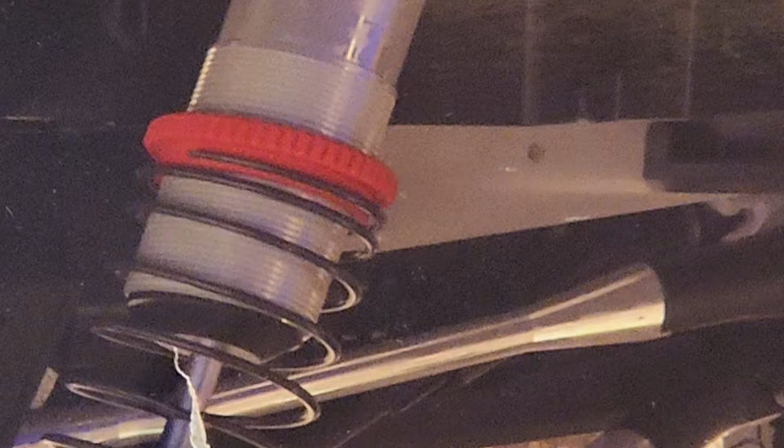No, there's nothing wrong with your computer, and there's nothing wrong with your eyes. Everything is fine, except everything has just been turned upside down. Or maybe everything has just been made enormous.

Well, there is a new kid on the block. But is he new? Or is he just wearing a new suit? This is a question of old: what came first, the chicken or the egg? One ponders.

What I have on the bench is the only one of these I have seen on YouTube in the United States. I'm not saying I'm the only one who has one, I'm just saying I haven't seen anybody else. You see these pretty readily on YouTube in other countries, and Facebook, places like that. But this is going to be an unboxing, yet another exclusive for RevKevRC.

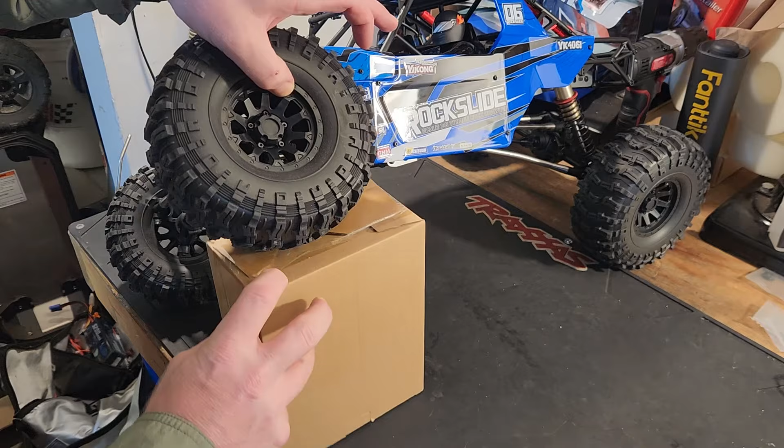That's almost exactly it. However tall this is, let's get our tape measure. Did I say 10? I'm at 8 and just a little over a quarter. I'm a guy, everything looks longer to me. Pretty good, though. That's pretty good.

And there's more adjustment left in the suspension because they have the adjustable. Let me pop this open. But let's just take a second and look at how much more interesting this is to look at than the Vertex. Now, don't get me wrong, I'm not hating. This and the Vertex, according to YouTube, were co-developed by YiKong and Redcat.

So I'm not mad. I just think that for what I like, this is a better value, regardless of the servo being a little bit less powerful. But I have a remote that allows me to program more things if I want, because I'm going to add some other lights. And I can add a higher power servo.

And, well, in this application, I don't know what these lights can take. I need to pop this open, the receiver box, and see what this thing's running and if there's a rating on these lights, because I don't want to burn those out. Because I could just run a direct power servo and avoid damaging anything.

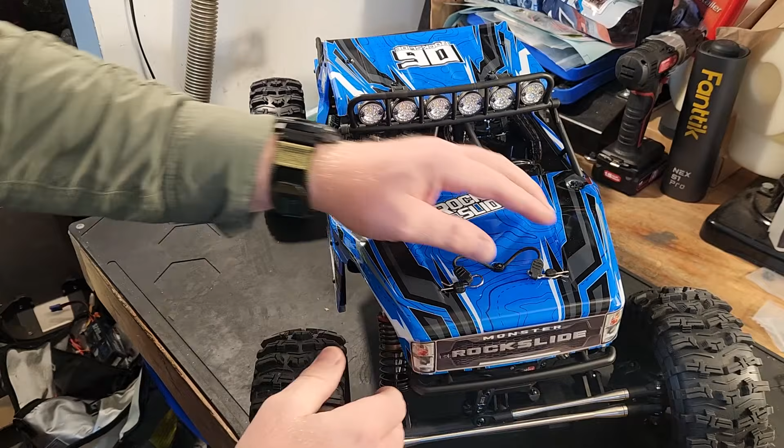But let's pop this thing open here. It's got a nice cage. I'm going to raise this. There we go.

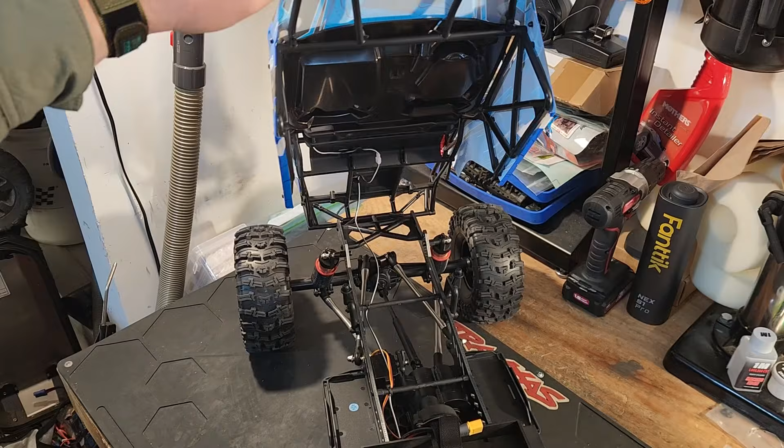It's got a nice cage in here. So our body posts and our body pins are not interacting with the body underneath. So that's nice, I think that's a good feature.

Very well braced. These posts right here locate into the cage, right there. So when you do roll it, you have this to roll on, you have this to roll on, and then it's all supported right there, which goes into the frame itself. So if you do end up crashing this thing, it probably won't be the end of the world.

Not to say it would be the end of the world for the Vertex, but I don't think that thing is framed at all from the videos that I watched.

Everything else about this is basically identical in terms of function and parts. So let me rotate it a little bit closer there.

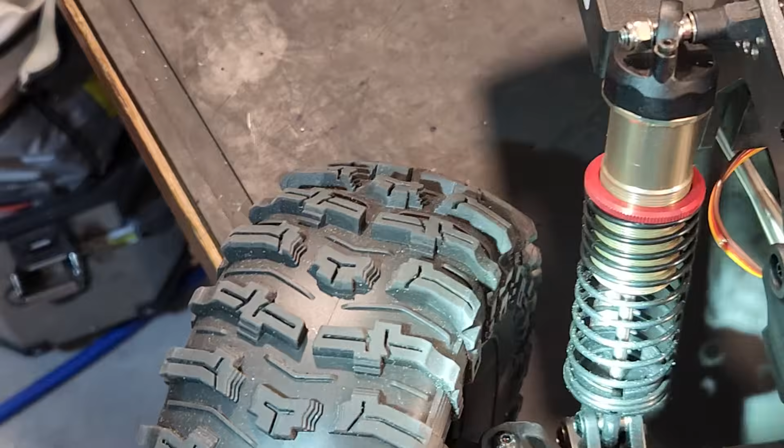Same, I forget what they're called, but the thing that everybody was talking about and they didn't quite understand what it was for or why you would do it. That thing, there it is. Right there. This little insert so you can flop this around and change the effective length of this bar. It's on both sides, on the top and the bottom, and also over here, if I can get the camera to show it. It's over here too. This side it's down here underneath because that's the same bar.

So it has that same weird thing they built into the Redcat. Exo Caged swapped his to see what it would do, and the last video I saw, he wasn't quite sure what the heck it was for. So, I don't know.

Pull you out a little bit better. What's the word? Steering servo horn, 15T. This one has 3 holes so you can adjust. If you don't get quite enough throw, you can adjust it a little bit more.

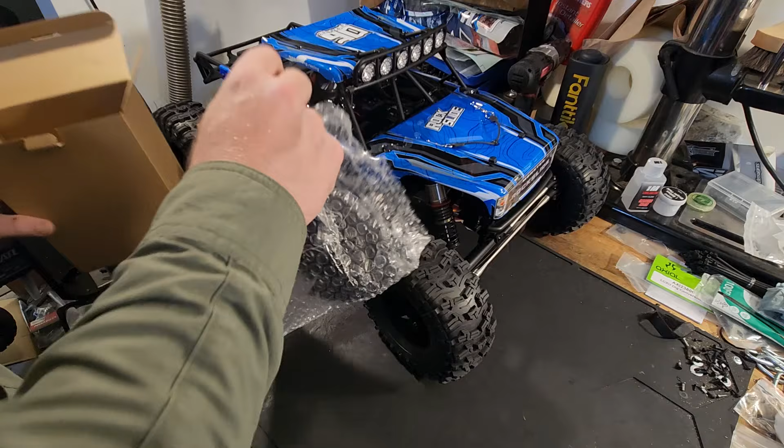Let's do the obligatory open the remote. We know there's a remote in here. This is going to be our beloved, tried and true Dumbo. Standard equipment for a lot of these RCs. And Dumbo is one of my favorites because they just work.

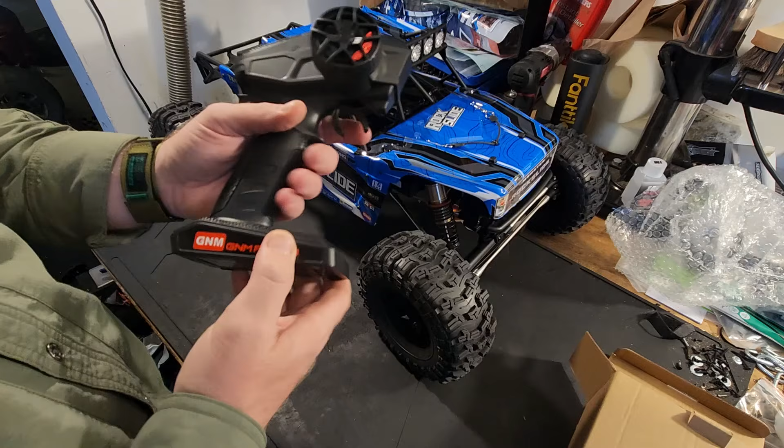They work. I might stick this on my DDF 350 just for the sake of controlling multiple cars with one radio. Although I might not.

It's got all your normal stuff. Steering trim, throttle trim. I don't think Channel 5 does anything. You can hit the dip switches and change all that good stuff. One of these is going to be for the overdrive, and then one of these is going to be for the lights. So we'll see what happens.

Let me get some batteries in it. We'll power this bad boy up.

All right, this is a 3 and 4S capable RC. I've got a 4S here. This has got a plug that I don't use, but I've got a workaround knowing that this was going to happen. I don't advise doing this. I will be taking this off and putting on either an EC3 or an EC5. But this is a hodgepodge of adapters. I only use these for charging batteries, never these, because I don't have these batteries.

Yep, that goes the other way. We're going to get us a battery in there and see what this thing acts like when we put it on 4S.

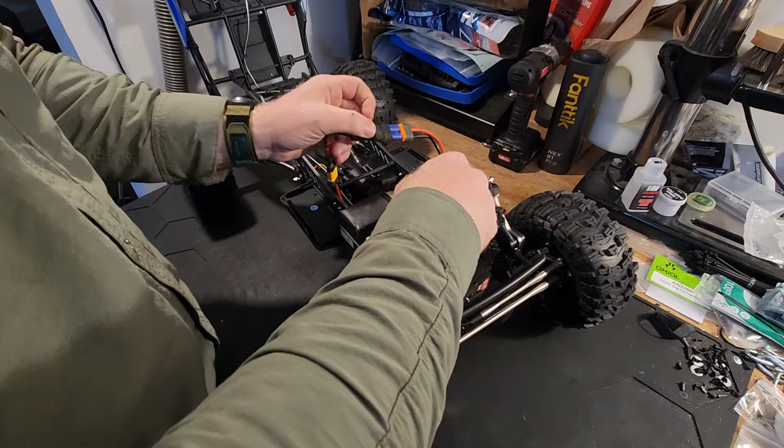Battery strap. If I didn't have this in here with it, it'd probably be long enough. It's a little short. I don't like the idea of this ridiculous adapter hanging out. I just might have to let it go. I'm not going to go and jump it out of a window. All right, well, that's just going to do that then.

All right, got some batteries in here. Turn that on. The button. All right, that was the right sound.

He's going here pretty smooth, not a whole lot of fuss or fighting. Not a ton of jiggle. That's cool. Servo's slow, but it's turning.

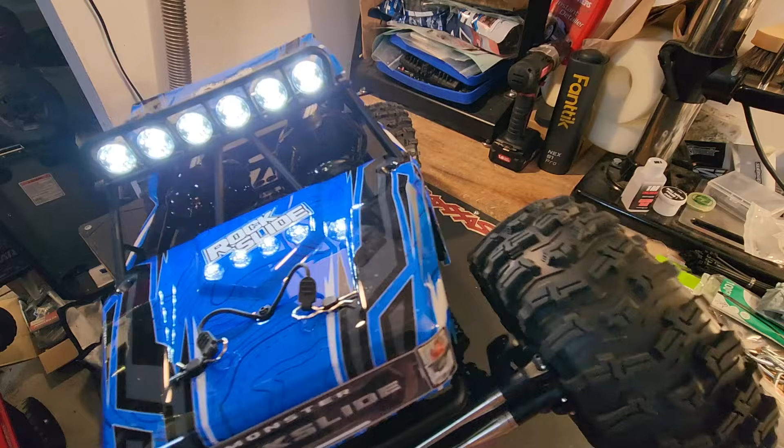Pretty good lights too, see what I mean? You just kind of get more with this. You get the drivers, you get the lights. Will it perform as good? Probably not, simply because it's going to have more weight up high. But that is manageable. You could add weight low, or you could just be okay with something that doesn't perform like a competition crawler.

Everywhere, all the time. Speaking of that, I didn't show it, but this does have it: the skid. It's the same skid. It's got that angle. I don't know if it's obvious, but it is angled lower here and higher here. So it is, in fact, the exact same thing.

Drag brake is really good. That's solid. Okay, so one of these... nothing, good. Okay, I heard a servo. That's going to be our overdrive, underdrive.

Let's see if I can capture that on camera. See the wheels turning. This is so much lighter than SCX6. It's ridiculous. Oh yeah, I can see it. That front's moving considerably more. I think it's supposed to have like 30% overdrive. Let me take it off and we'll see what it looks like.

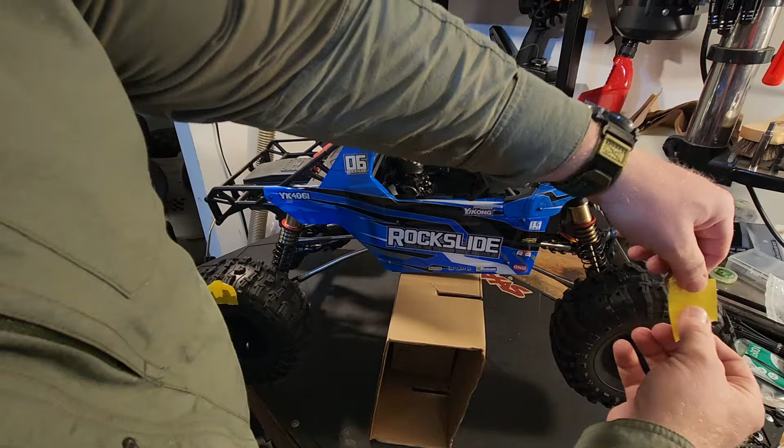Yeah, they didn't program the Hobbywing, they just flipped the dip switch. Okay, same speed. Nah, let's do the tape. Proper way, right? Do the tape. We'll make it extra obvious.

Which one of these slows down or speeds up? I say the rear slows down, the front stays going the same speed.

Yeah, the back even stopped a little bit. Let's make it more obvious.

Yeah, I say it's actually underdriven, and if somebody knows better, if I am just not understanding terminology, which is 1,000% possible.

Now the rear is not going the same speed as the front, so they're calling it overdrive. But to me that is underdrive, because the rear has become underdriven. The goal, of course, is to have the front become faster than the rear, and they've accomplished that not by making the front go faster, but by making the rear go slower. So it is underdriven in the rear, not overdriven in the front.

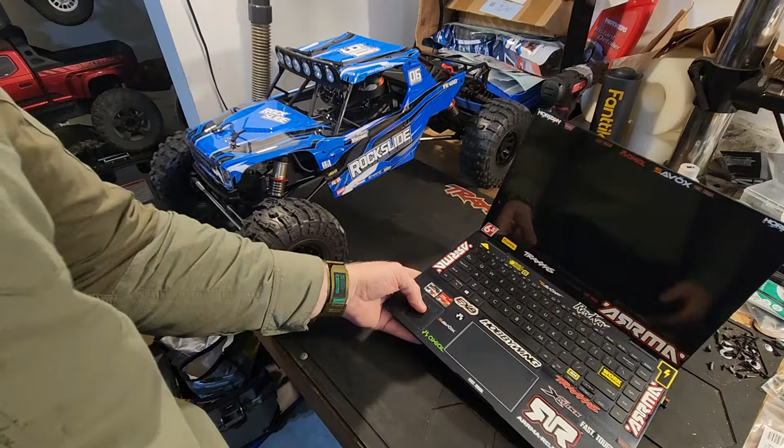Turn that off, grab the old computer. I'm going to take you guys out of there and show you what we got going on screen. All right, got you right in front of my laptop. This is about as good as it's going to get.

We got Vertex pulled up here. Things look pretty familiar, don't they? Showing all that. Oh yeah, and the Vertex one is in color, so I do like that. I do like that. I have that battery. So all the general stuff, kind of your quick start, how to do things.

Underdrive. They have called it underdrive, which leads me to begin to believe that the YiKong is more of a creation of Redcat than it is a creation of YiKong. The Rockslide is perhaps the imposter, and the Vertex is the original. Or it's just something in translation that got messed up, and just like all of us who are trying to understand what underdrive and overdrive are, maybe they did the same thing, because functionally they are the same thing. They do the same thing, but they definitely call it underdrive, and YiKong calls it overdrive. So that's a nice little discovery.

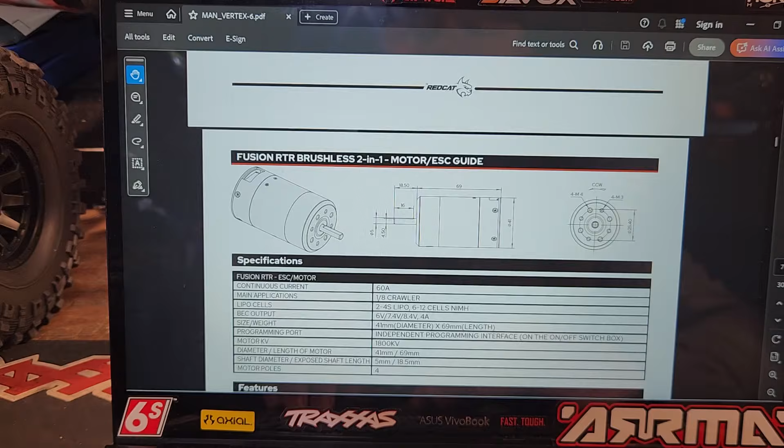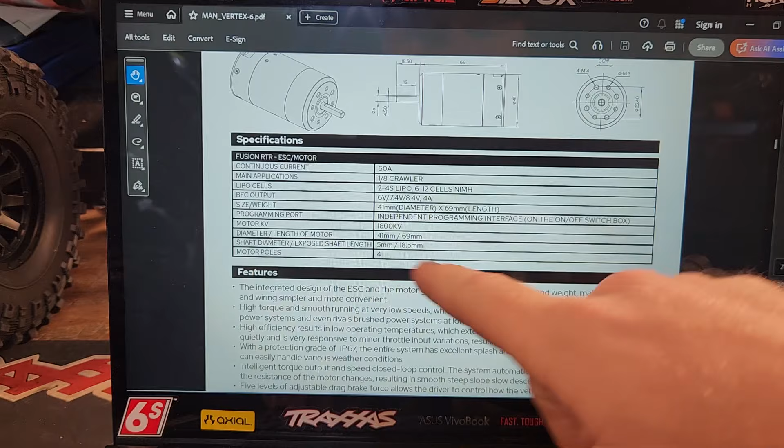Alright, it's going to tell you how to do your binding if you need to - it already comes that way. Let's see, yeah, all your good stuff. All of this stuff is identical. Let's see. Yeah, because that's just describing what's in the motor ESC combo. This entire bit here about features for the ESC and motor do not exist in the YiKong one.

Most importantly, your motor pairing, that's in there. This does not exist in the YiKong one, but it is applicable.

I sure would like this to go away. I don't want you here. Yep, I guess I just have to deal with you. Pull this over. No, don't do that. Don't do that.

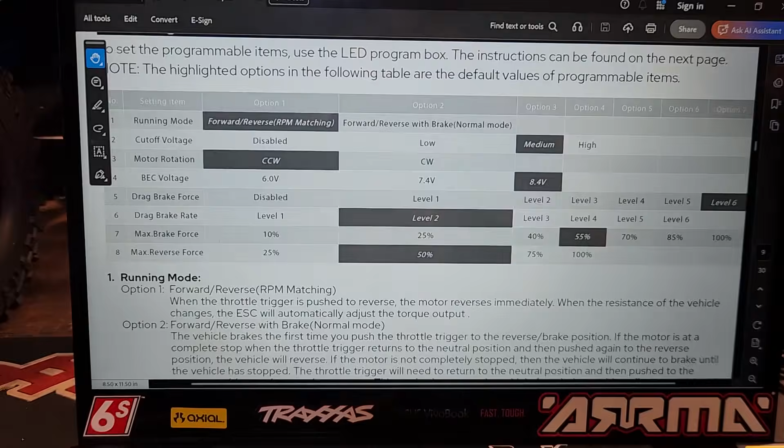All right, good enough. So take a good look at this. We don't like that either. It should look okay on your screen, or when this comes out in video, it might just be a bunch of trippy, flippy nonsense.

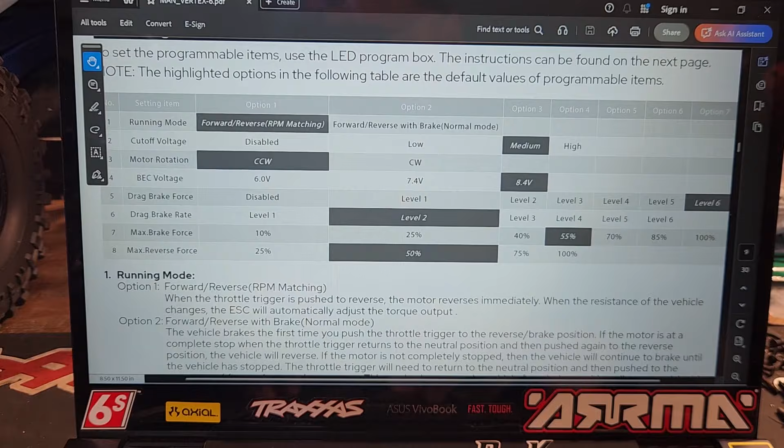But so you got parameters that we can adjust, and I'm going to do that. In fact, that's one of the reasons why this laptop is out, so I can do it right now. And we'll choose what we want.

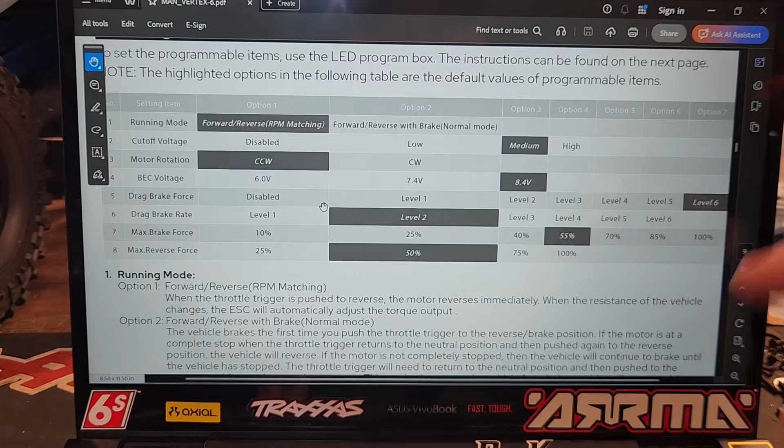But this is on page 9. If you look over here, it's on page 9, and there is a lot of other stuff. We got 30 pages of manual in here.

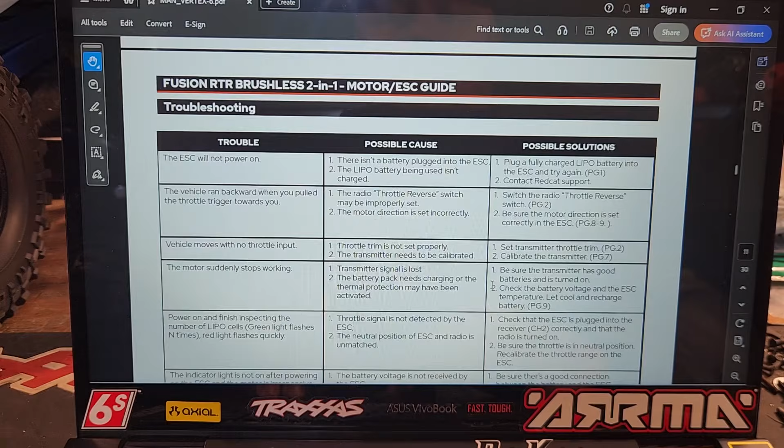And they even tell you, like, you got to use one of these. It doesn't tell you to get a Hobbywing one, but that's what it is. All this good stuff. There's your parts.

I'm going to give you a quick rundown of the YiKong one. It's on the next tab. It's open. There's your front wheel weights, your exploded parts. These even give you the length. The YiKong one does not have the length, but they are the exact same part.

All your shocks. Yeah, you get it. This is it. You can go on Redcat's website and download this for free.

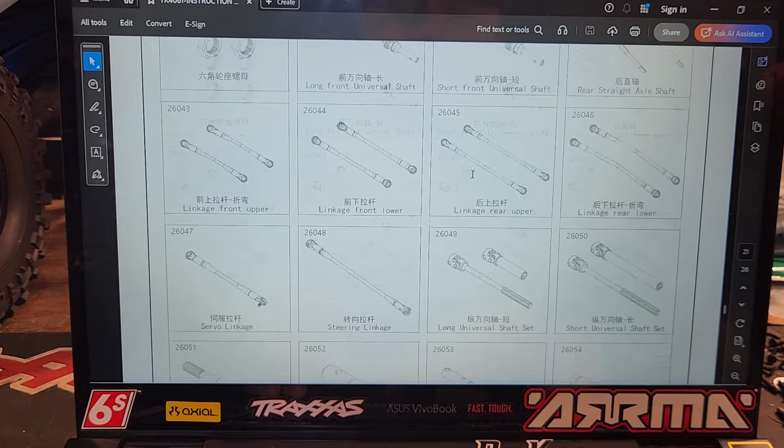So here's the YiKong one. Let's see, just home. You're gonna have to get used to looking at what I'm assuming is Chinese. It's the main language, so it comes first.

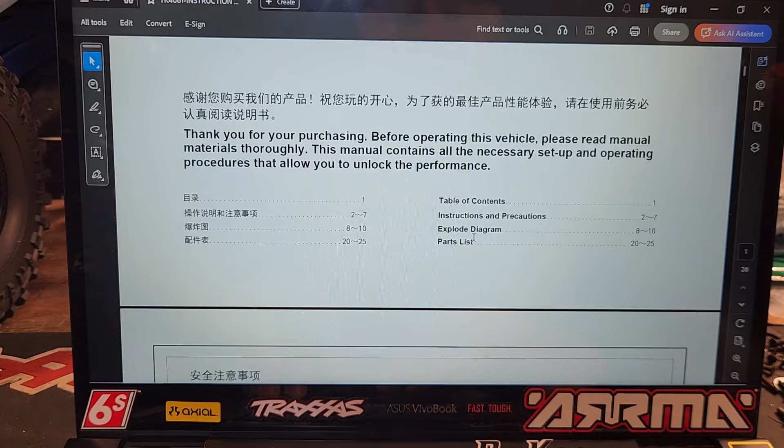This one is 26 pages, so there is clearly less because there's 2 languages on here, and there are 4 less pages. That doesn't bother me, and hopefully it won't bother you if you really like the look of this and the price that you can find it for. All the information that you might want is available.

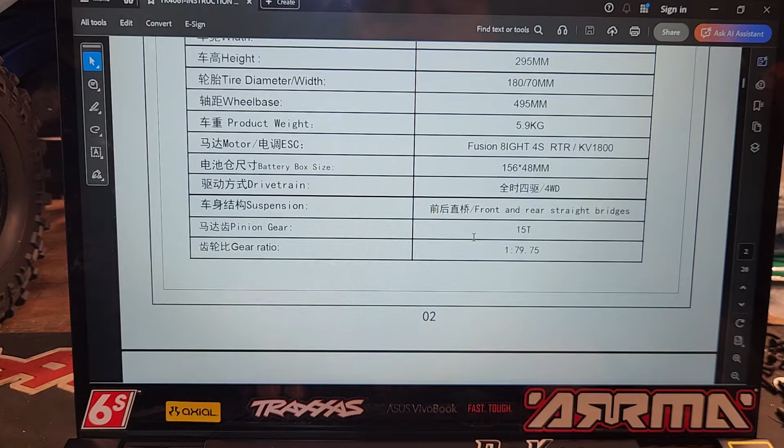There's all our, it's just telling you what everything does. They conveniently do not describe what channel 5 does because it doesn't do anything. You can probably put something on there if you want to.

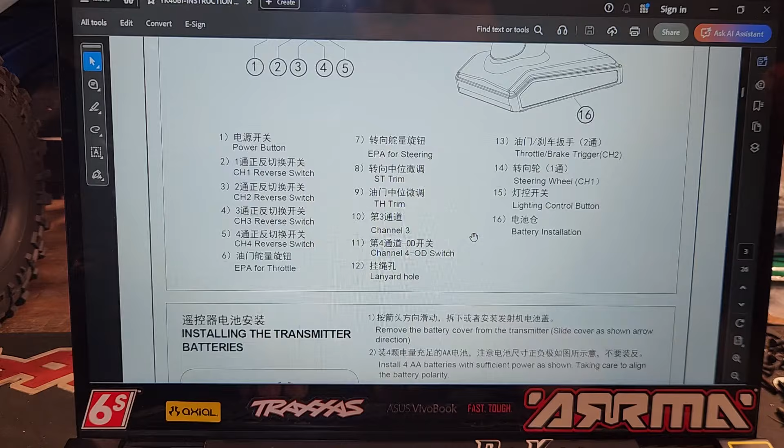Say if you swapped out into the Fusion 8, the one you buy that's not part of the RTR, that has the additional wire to adjust your drag brake, you could probably use that knob for that. I never use that knob. I just put it on like the auto, bug flying around, and let it ride.

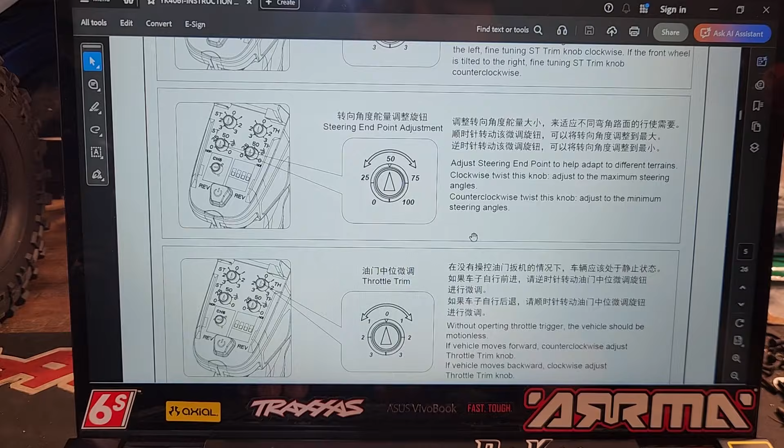All right, it's just telling you that. Turn it on. There's the button. It goes forwards and backwards. It turns left and it turns right, and here's how you adjust the trims if it doesn't work right. Things that we're all fairly familiar with.

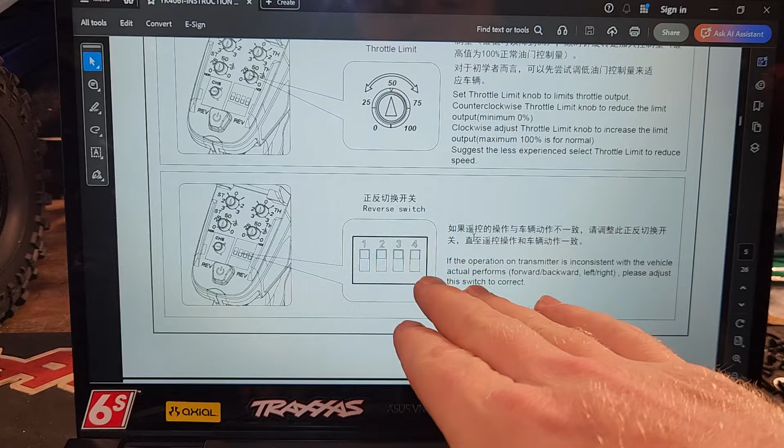If the steering or throttle is backwards, you just flip 1 or 2, whichever one it is. 1 is obviously steering, 2 is obviously throttle. 3 and 4 are the 2 buttons up on top. That one and that one.

So if you get yours and you press 4, and if you want the default to be no overdrive, but with the light off, but you find that when it comes out of the box, the light is on, just flip the number 4 dip switch. And if you don't like it on number 4, you can plug it in the number 3. It'll be just fine.

What else? We're at 46 minutes here.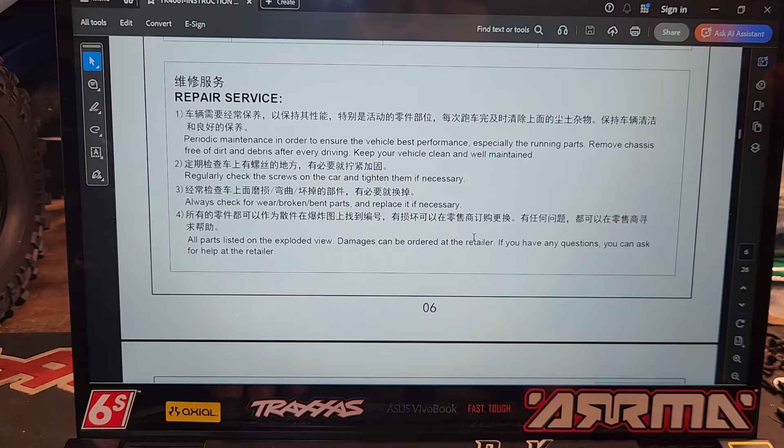Okay, we got some repair stuff. They're probably just going to tell you to check all your screws. Yeah. Lubricate, metal. Yep. This is pretty neat.

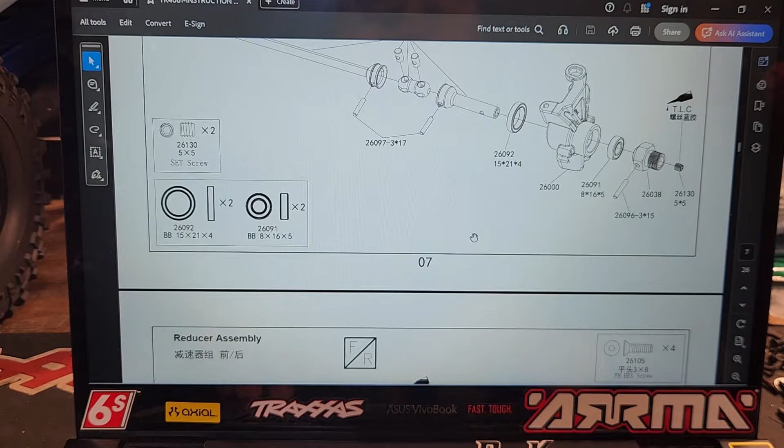The parts explosion, they're much bigger. I do like that. See, it gives you the bearing measurements, part numbers and bearing measurements for all that stuff. I think the parts diagrams, exploded view, and all that stuff is done really well.

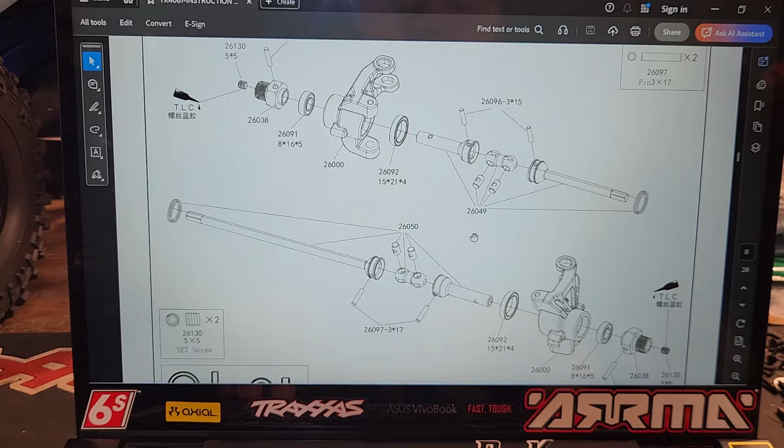And here's the double jointed front drive steering knuckles, CVD, whatever they're called, universals.

Interesting, this is not a portal. They've called it a portal, but I think there's just language things happening here.

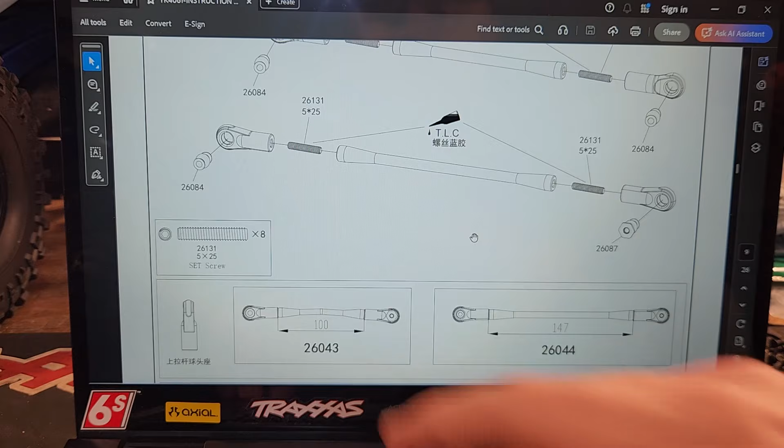So yeah, these are threaded, steel, plastic, aluminum. And one of these ends ought to be probably a 2.5 or 2 millimeter hex, so you can screw it in.

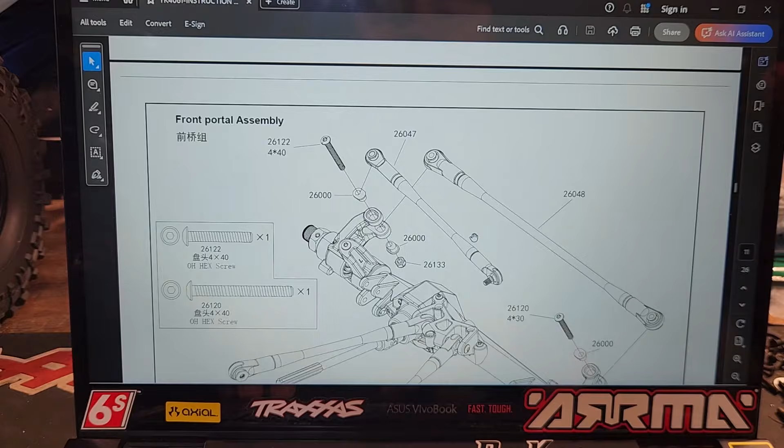Well, got some bent ones. Yeah, I think the parts breakdown for this, for reassembly purposes, may be better. I like this one.

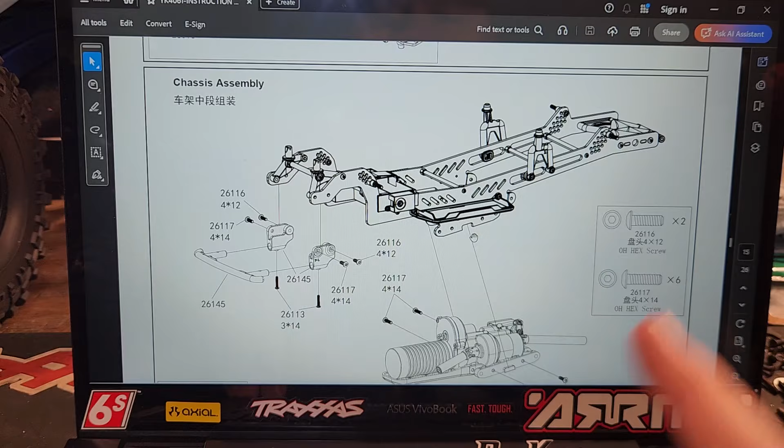Now, a fun thing you can do if you bought a Vertex and you get bored with it, you could just buy all the relevant parts and swap it into a YiKong, to a Rockslide. Also, the Vertex only comes in one color, which is kind of dumb, but this thing comes in three colors: red, green, and blue.

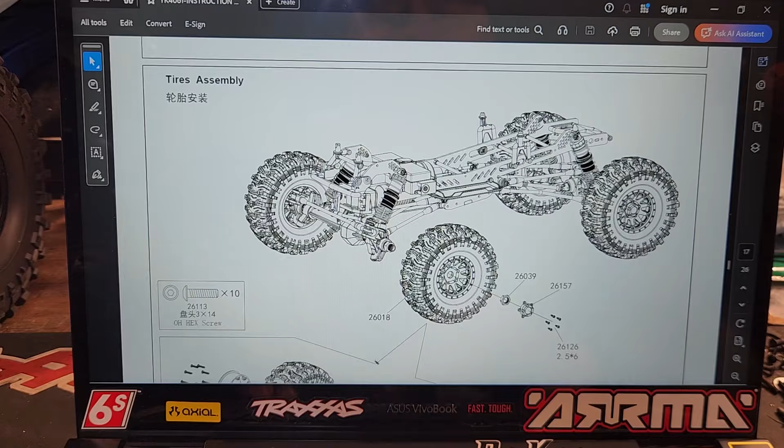Yep, there's your weights. You could probably find these on AliExpress, because I haven't looked recently, but the Redcat serialized part was on back order because everybody wanted it. Yep, there's all your lights. Pretty neat.

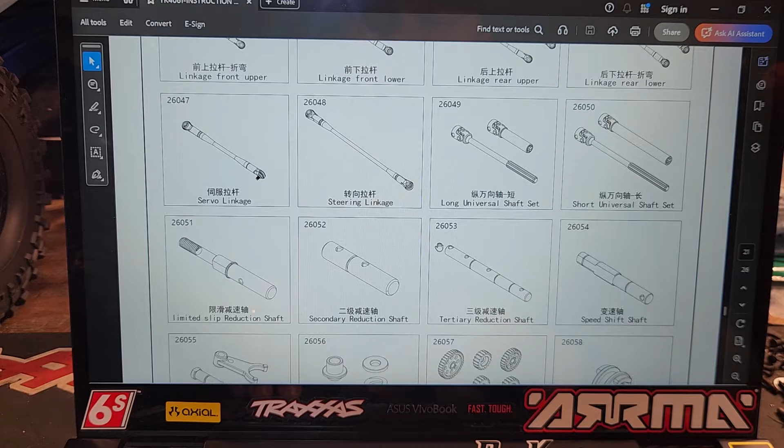Oh yes, and it tells you—what did I just see? Something in here that was interesting in how they labeled it. I think it was they give you the teeth count. Thought that was neat.

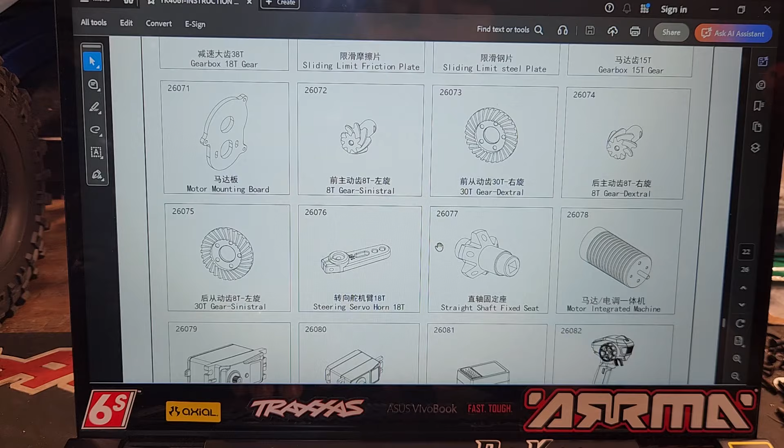Some of these strange ways of phrasing things: sinistral, dextral. Like, you can tell that one spins and engages one way, and that spins and engages the other way. So that's probably what that means.

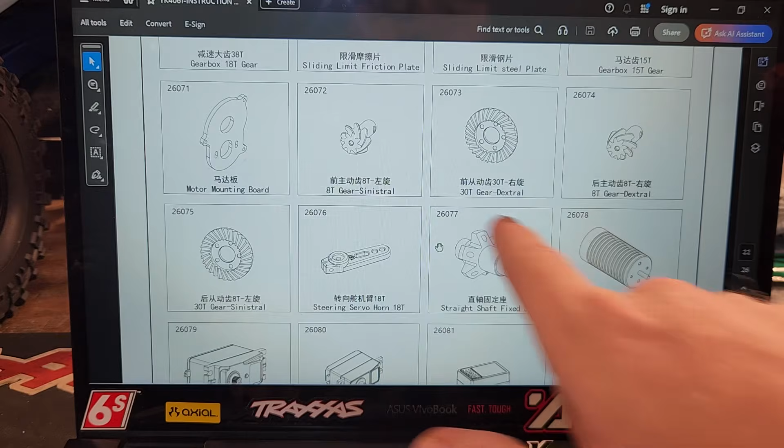15T, that's going to be the pinion for the motor. See, it's got the hole.

Every screw on here, every single one of them. Very thorough, I thought. I think it's nice whenever you buy something that is not available.

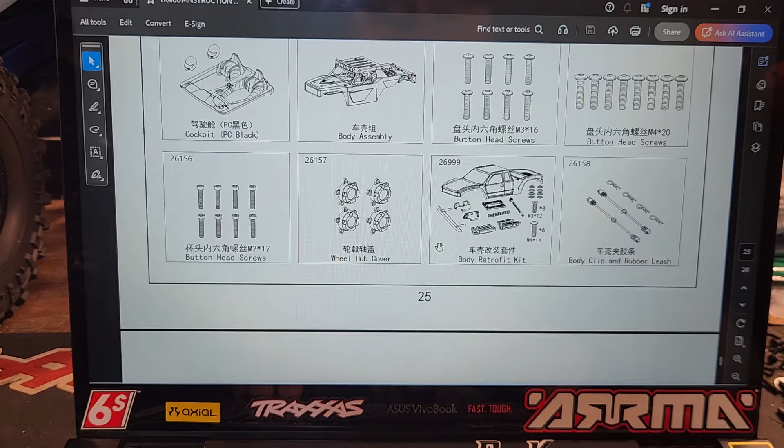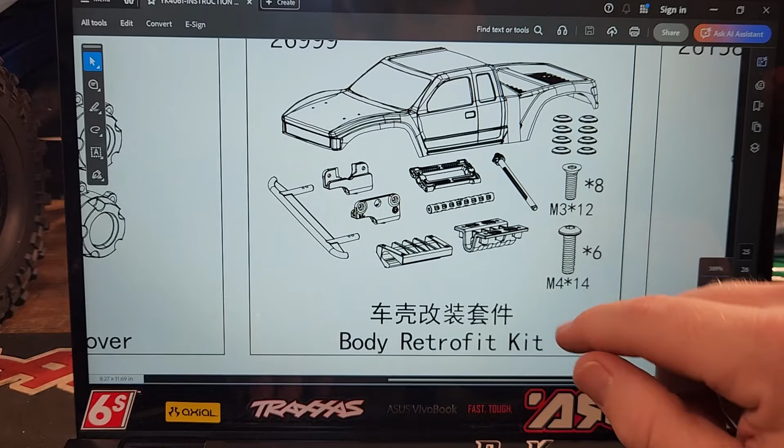Oh, I didn't see that before. I wonder, this is not in the Redcat one, I think.

What do you think this means? This is the Vertex conversion kit, body retrofit kit. That's insane. And you can buy it as a whole kit.

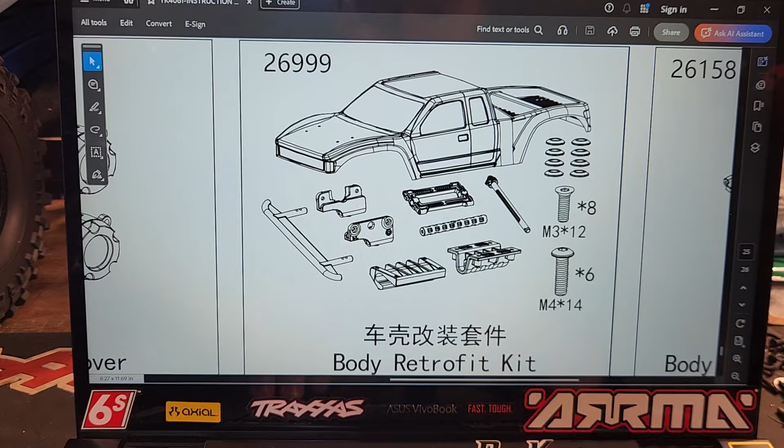It's not even that many things. I thought it'd be more. That's crazy—yeah, they're the same thing.

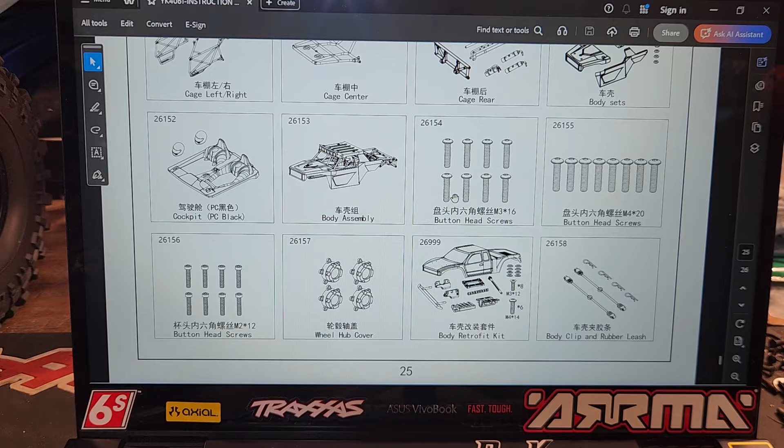I think after looking at that, I'm kind of thinking that maybe the YiKong was first, because I'm pretty sure it came out first. And there's their retrofit kit, which is called the Vertex in the States. This is very, very interesting.

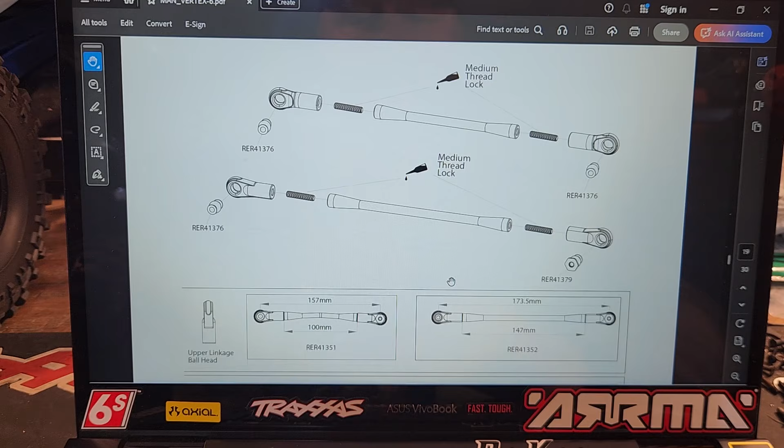Oh, here's your servos. There's your exploded parts. All right, these are pretty good, these are pretty good.

I think they show you all the exploded stuff after all the parts, just like the opposite of what the Rockslide is.

But there is absolutely nothing in here about getting a Rockslide body. It's page 30, that's it, that's the end of the line. Very interesting.

I don't know, I'm thinking the Rockslide was first, and the YiKong or Redcat bought some rights to it somehow. I don't know, and I don't really care. We're all gonna get what we want, we're gonna buy the thing that we like.

Like, I don't hate that, but it's not even close to as cool as that, in my opinion. That's just like my opinion, man. So—

Let me take the cover off this thing. There's just two screws, one there, and we can get to the plug. I'll pull up the Redcat program page, and we'll see what we see.

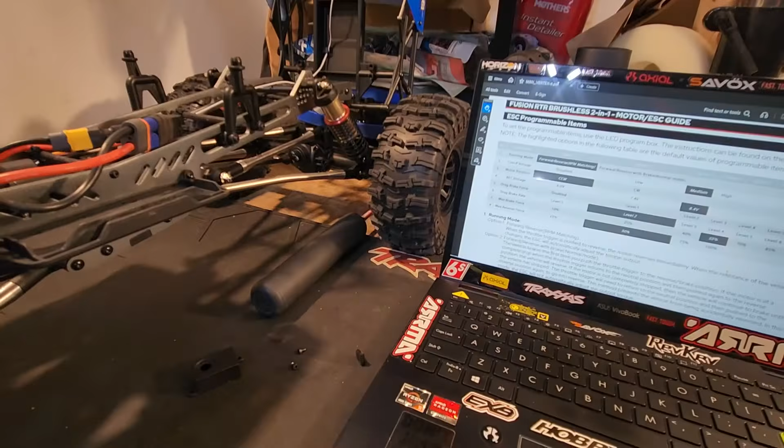All right, we got the cover off. That's it, there's a hole for the button, two screws, those are 2mm. There is a rubber plug that lives in here protecting that port.

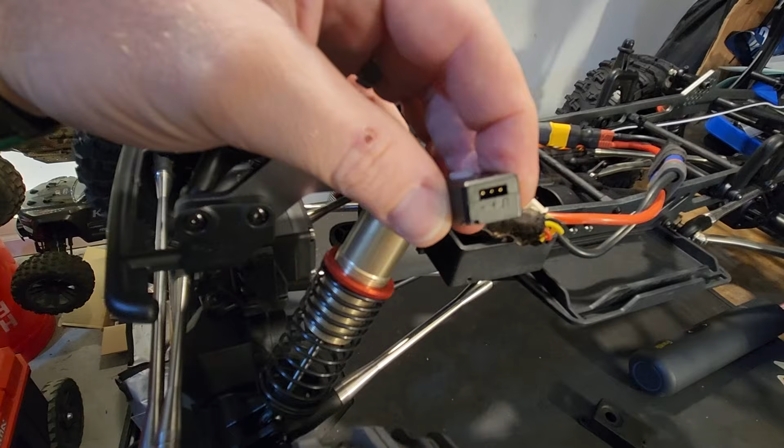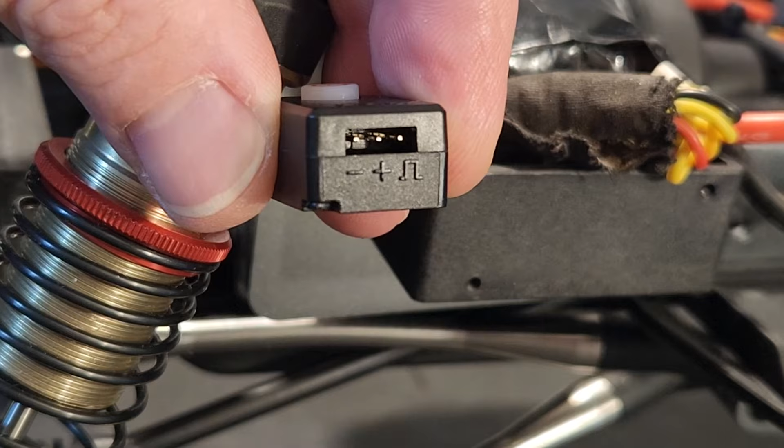Whenever you plug this in, you're looking for—now this is for people who don't know anything at all—that pattern. See if I can get it to zoom or focus. This pattern: the negative on the left, the plus, and then that U-shape looking thing, that upside down U, that's your signal wire. Your program box is going to have one that looks just like that.

What you're doing is the white wire, which is a signal wire, goes on the right side with the upside down U signal orientation. So ground, power, signal.

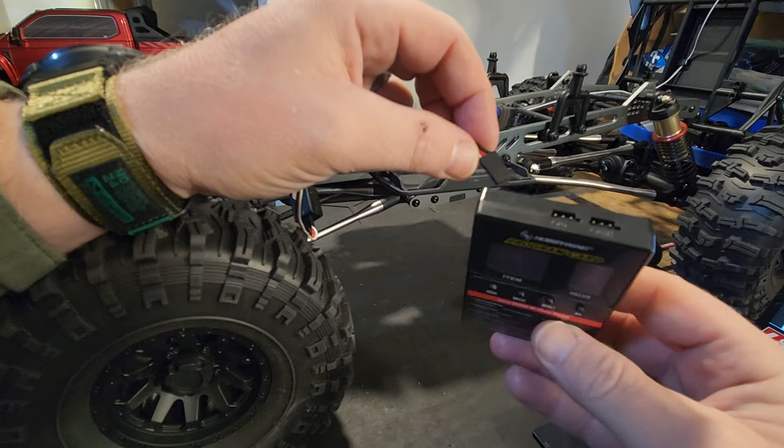Your program box, which is—this is the old standard, been around for everything—Hobbywing program card. I've used this for so many things, including some Spektrum stuff. So Hobbywing is in everything.

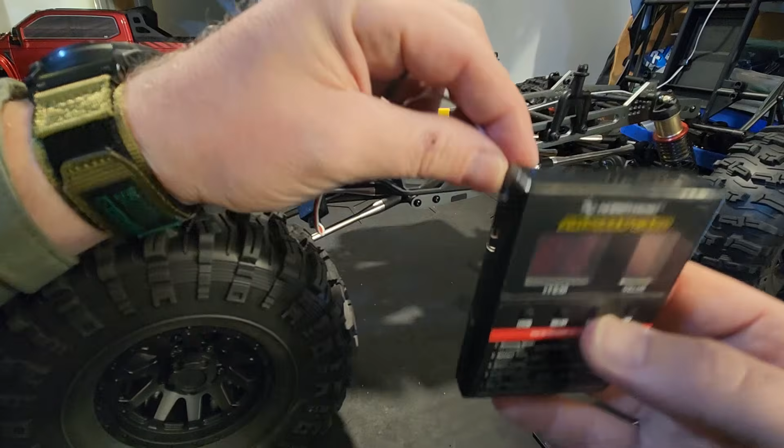But you'll notice that we're not using that one, we're using that one because it has the ground, power, and signal. White is the signal. So plug that in. The truck is off—you need to make sure the truck is off with a battery in it when you do this, and then turn it on. It doesn't matter if the remote's on.

All right, so we have—let's see if I can make this bigger.

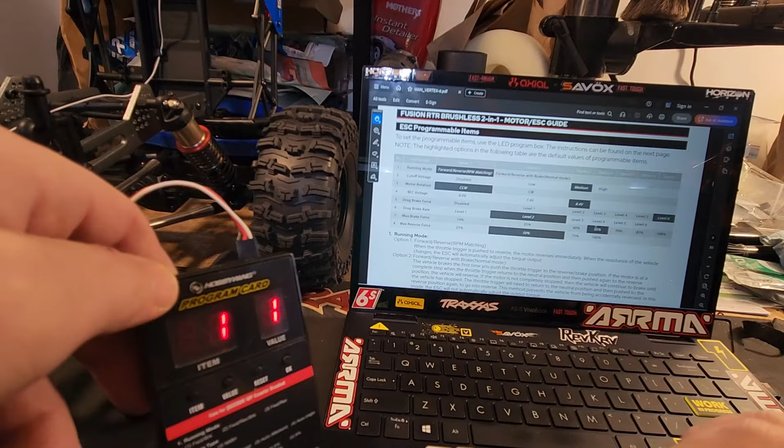All right, it's probably as good as we're going to get. Number one, set on 1, which is the default. Let's just see.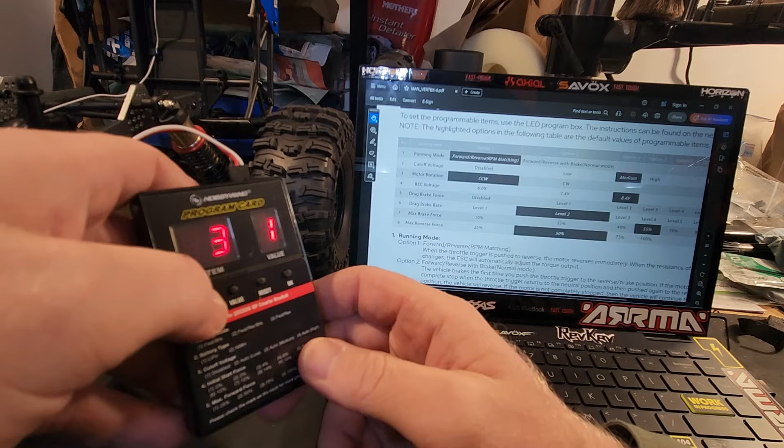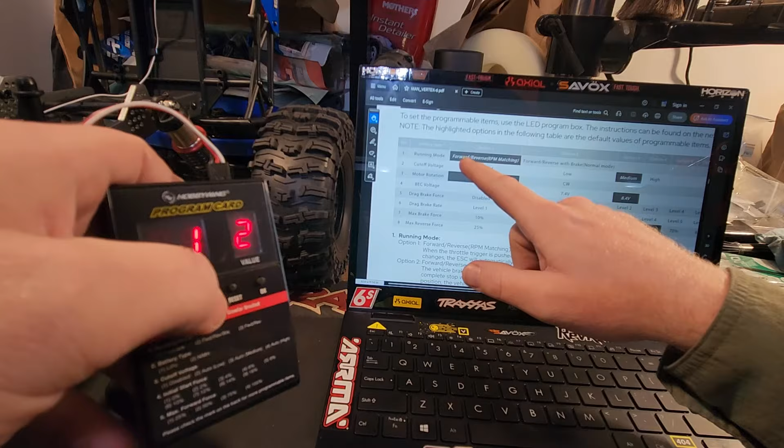Oh, you know what? Let me go back. There's only 2 options, which is correct. So we're going to leave it at forward, reverse, and RPM matching. We're going to leave it like that.

So go back, 1 and 1. Let me just hit reset. Oh wait, 1 and 2 is forward, reverse with brake. That's not what I had.

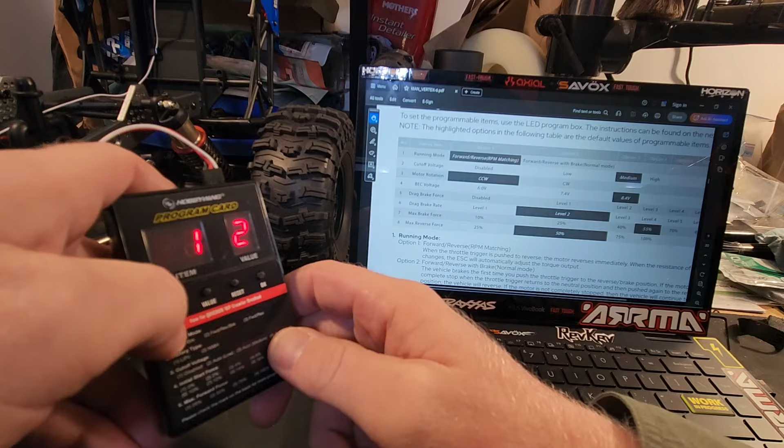Interesting, let's reset that. We want 1 to be 1, forward, reverse. Do I want RPM matching?

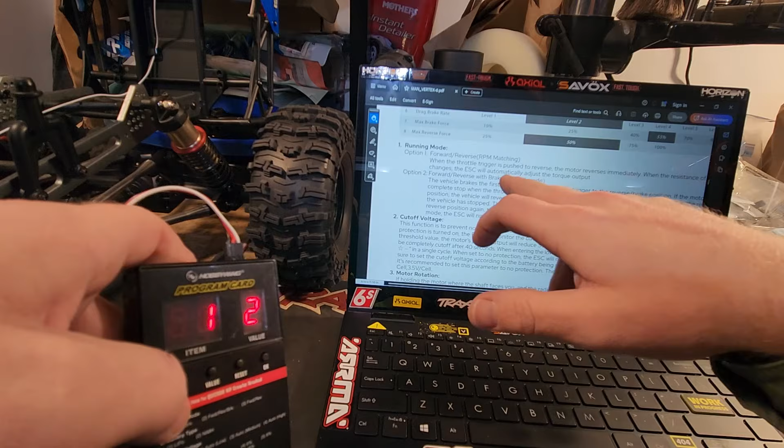Let's see what this says. Forward, reverse, RPM matching. When the throttle trigger is pushed to reverse, the motor reverses immediately. When the resistance of the vehicle changes, the ESC will automatically adjust the torque output.

Okay, option 2, forward, reverse with brake, normal mode. The vehicle brakes the first time you push the throttle trigger to reverse. Now we don't want that.

So option 1 is what we want. We're gonna select value, it cycles back to 1. Hit OK. You don't have to hit OK through all of them, but I do. You can wait to the end.

All right, item 2 is cutoff. It's over here, it's got it medium, for 3 we're going to leave that.

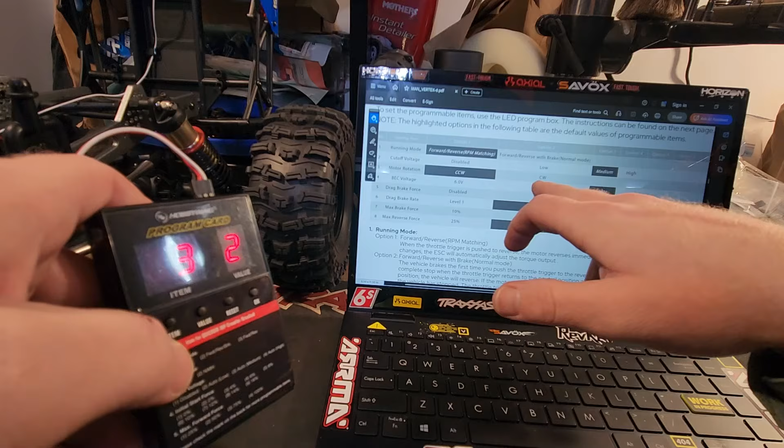Item 3, motor rotation, that's set at 2, which is clockwise. We're gonna leave it where this says, because that's the default and it was already working. I'll leave that.

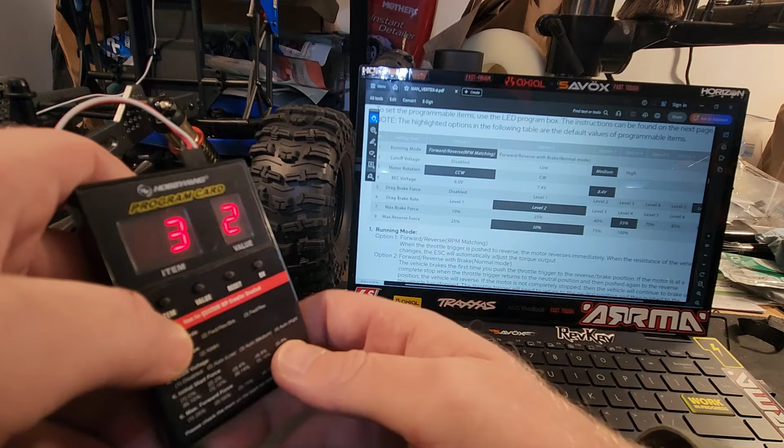4 is BEC, it's at 1, it's at 6 volts, that's sad. Let's hit value, and if we cycle through, no, it only goes to 2. So this may only put out 7.4, we'll find out.

So number 4, BEC voltage 7.4. Okay. So I guess it's possible this is not the same ESC, and this it might. It says the same thing on the box.

Now let's just see, drag brake, number 5. Default is level 6, this is at level 7, so this is strange. This doesn't even have 7 levels on any of these on this entire thing.

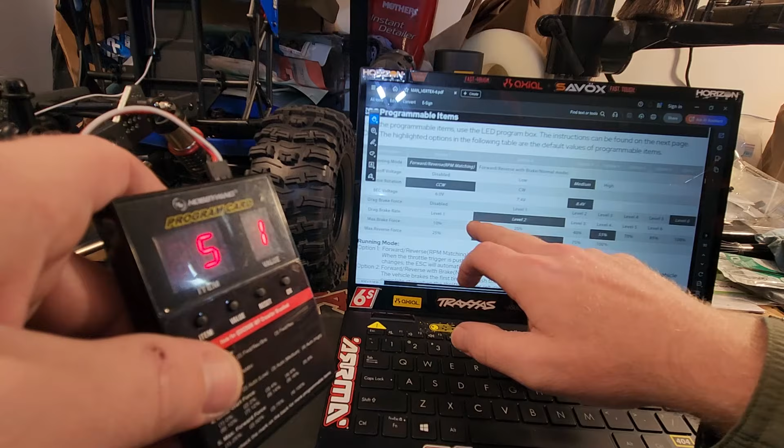Let's just click through the values. You got 1 through 7. If we assume that that's drag brake, let's just go back to 7 because I want full brake. Yeah, there's only 7.

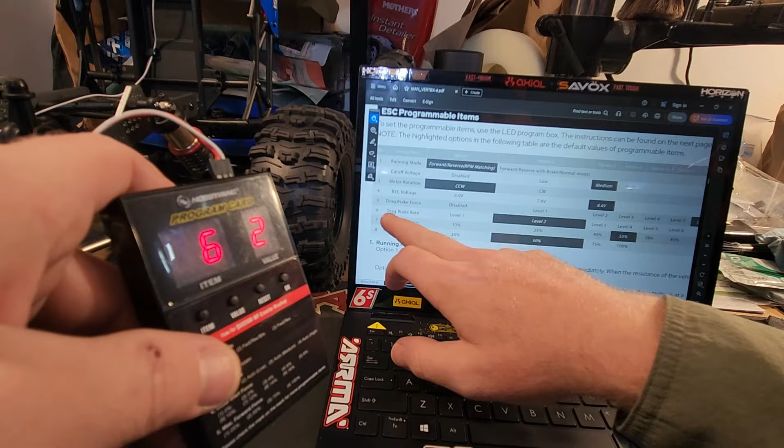Item 6 is on 2, drag brake, this has levels up to 6. Excuse me, this has levels up to 6, and that's parameter 6, which we're on.

Drag brake rate is 2. It's on 2. Let's see how many values that we have. Okay, it's got 6, so that's probably right.

I don't want it to be so fast because that's the rate at which it gets to fully locked. Let's leave it at 2, see how that goes, because I would like to be able to go full throttle and stop without it doing a flip.

All right, 7 is at 4. 7 is max brake force, probably. The default over here is 4, which is at 55%. Let's leave that too.

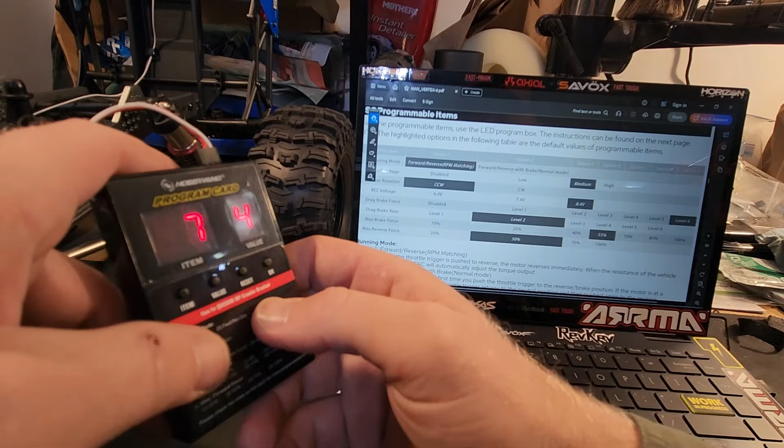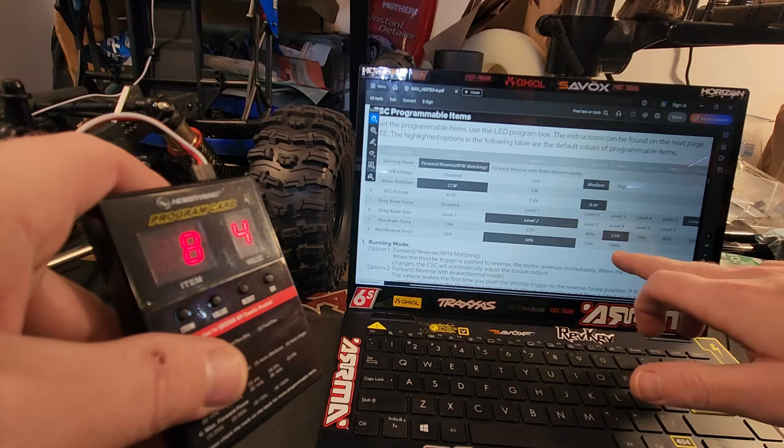8, it's at 4. Max reverse force, this one is at 50. This one is at, there are 4. Let's see, all right, 1 through 4.

We have 4 options down here for number 8. So it was at 4 for reverse force. I don't think we need, let's go 75. We'll do option 3.

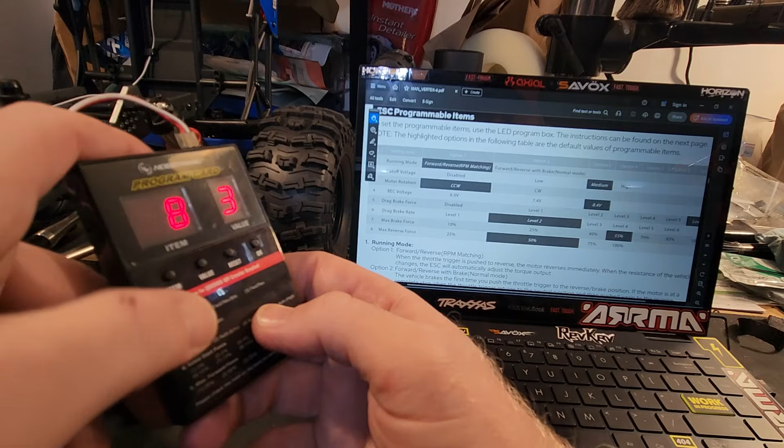And we go back, we got 1, 1, so that is correct. 2 is at 3. 3 is at 2, that was the default, so we're not going to touch it.

4 is at 2, which is now 7.4, hopefully. 5 is at 7, which was our drag brake force. It's all the way up.

It's like 1 level higher than theirs somehow. 6, 2, yep. 7, 4, yep. Oh wait, I went to 7, 4, option 4, 55%.

Drag brake, oh, max brake, yeah. I went to 4, okay, they went to 4.

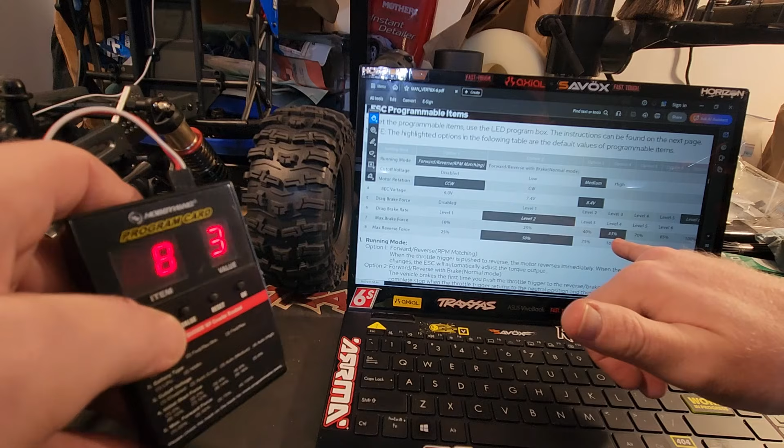Sorry, moving this back and forth is confusing me. So 7 is 4 on them, and 7 is 4 on us. 8 reverse is 75%, yep. Okay, so that's all correct.

Now, once you've done it, if you think you've got it right, you just turn the truck off.

And then you can unplug this. Now we're going to test it real quick. This video has already gone on for an hour, we'll see what I cut out. I'm just going to let this kind of chill over here, or maybe like that, because the body will stop it from moving. That way, if I need to adjust it again, I don't have to take it all back apart. But I'm going to get the body together, and we'll see how fast it is and if it doesn't flip.

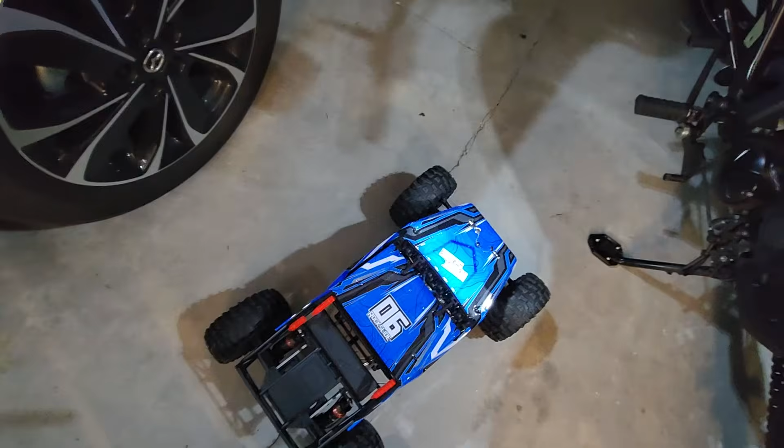All right, so the motor rotation was backwards, so I might need to go in there and fool with that. I just flipped it on the switch real quick to see. But we're going to see what happens with the drag brake settings, because those are the ones I really care about the most. It stops pretty hard.

All right, so what has happened is I flipped it on the remote to try to make it work, and what I'm getting is 75% throttle and 100% brake because I flipped it on the remote. So I need to go back in and swap that around the right way.

Hold on, okay. I do believe I got it right. I actually didn't do it - I wasn't wrong necessarily, I just wasn't paying attention. The box was correct, I was just watching the wrong parameter on the screen. I can say that I do believe the voltage is higher. That seems a lot faster.

See if I can... yeah, that seems a lot faster. Hopefully the LEDs don't die. There might be a special spot in there that powers LEDs only on like 5 or 6 volts. Dumbo RCs come that way a lot of times.